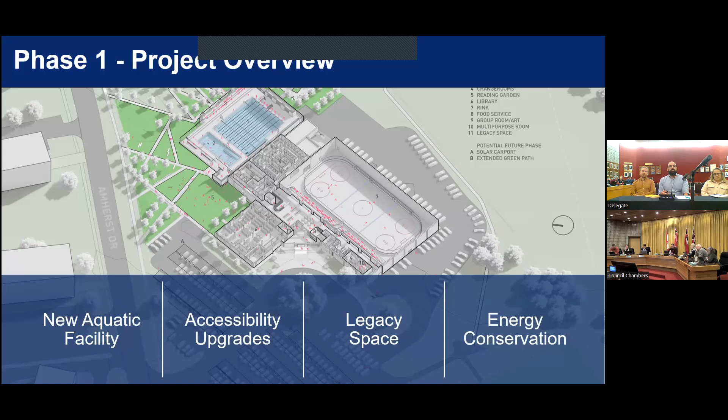Getting into it, the aquatic portion of the project involves the construction of a new 8-lane, 25-meter pool, as well as a leisure pool, shown circled on your screen. The old pool hall is being proposed to be converted to change rooms and administrative space. We are working within very limited space constraints, so it's a matter of figuring out how much we can fit in this space to provide the level of service expected from the community.

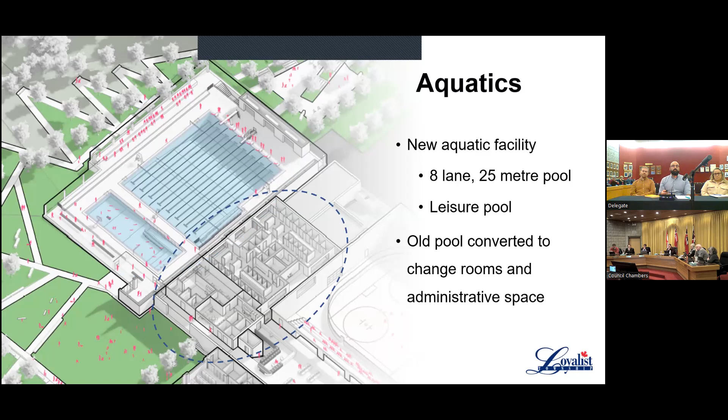We then move on to the arena portion of the project. As part of life cycle works for the facility as a whole, we are proposing a new arena pad, boards, and glass. This work needs to happen regardless of the community hub project, as this equipment has reached the end of its useful life and needs to be replaced in the next two years, as identified in our asset management plan. We're also looking at mechanical upgrades to the change room area, and accessibility upgrades here as well.

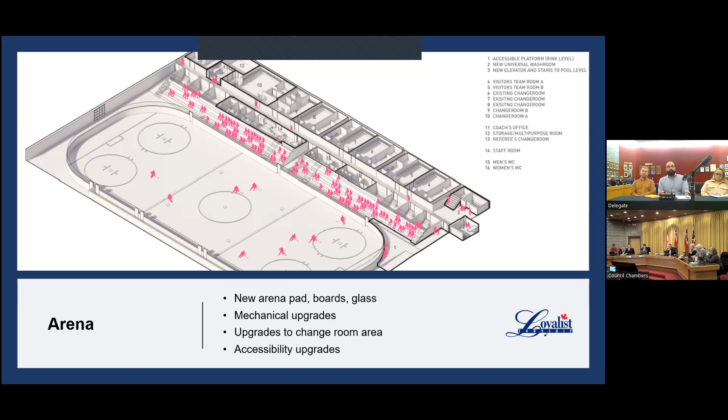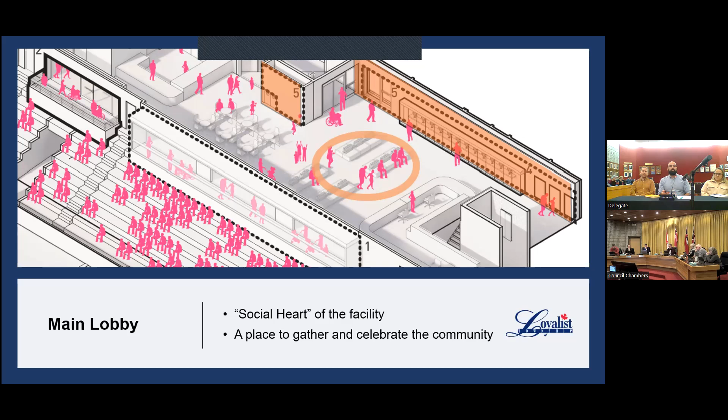Moving on to the main lobby, we'll be using the term social heart a lot. The reason we chose that is because it refers to a place in the center where the community can come together, celebrate, tell stories, and just gather as a community. So we figured the term social heart would be quite appropriate here.

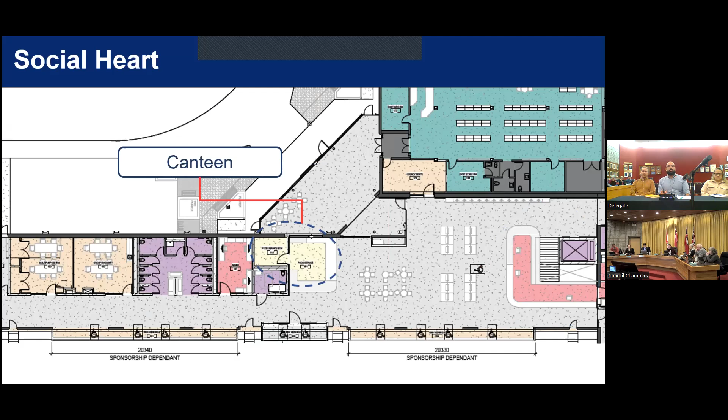Looking at a floor plan, everyone recognizes that triangular entrance that's almost iconic to the site. Going through the front doors, you'll see the front desk circled on your screen. People would work their way over to the front desk and be greeted by a customer service representative. The existing front desk would be converted to canteen space, and the washrooms would be renovated and retrofit to be accessible.

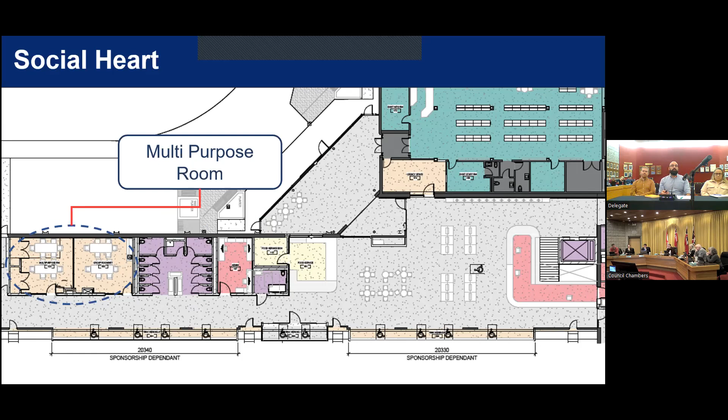Two multi-purpose rooms that could be joined into one would be created where the empty space currently is, and you can see some accessible viewing into the arena. There are two different concepts being proposed here. The middle one, detailed on the right of your screen, is an in-arena wheelchair viewing area that allows people to be within the rink and watch the action on the ice. The one on the left is in the hallway, but it provides that same viewing behind the glass to the arena.

The first one we are trying to incorporate into the project, whereas the second one is potentially sponsorship dependent, or depending on funding availability, because there's obviously a cost associated with this. One of our goals as a project team is to make the facility accessible for everybody, and we feel this is a very good way of doing it. Hockey is a very important part of our identity as a community, and we want to make sure it's accessible to everybody.

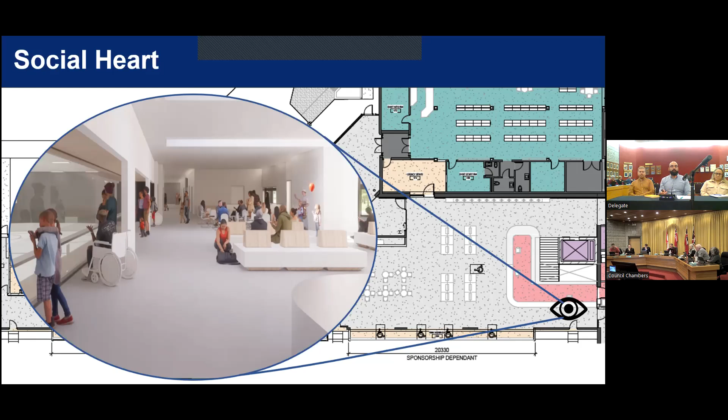The last part for the social heart itself is the inclusion of the legacy space. We partnered with the Gord Downie Chanie Wenjack Fund, an organization which, among other things, helps facilities and organizations create legacy spaces in their buildings. The purpose is to educate and spread awareness about local Indigenous history and our journey towards reconciliation. When we were putting our application into the GICB program, we figured this would be a really good partnership and a really good way to advance reconciliation in Loyalist Township and celebrate Indigenous communities specific to the area.

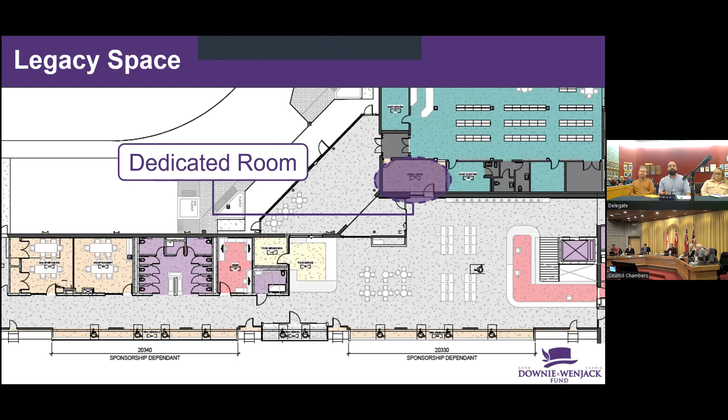The original plan proposed converting the library conference room to a dedicated legacy space, and that's still the plan. But we thought we could take it a step further. The orange highlighted areas are just wall space, and we thought this would be a really good opportunity, as well as everywhere else in the facility, to display our history, not just from the 1800s on, but also going back millennia. That open space can be thought of as a canvas to represent Loyalist Township for everyone, which goes back to the point of inclusivity.

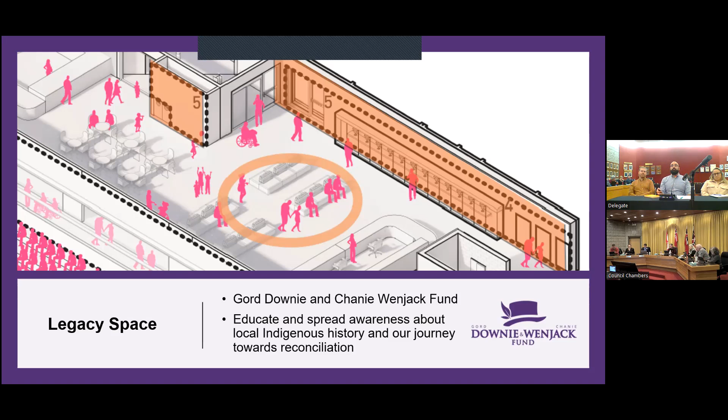The last point is energy conservation. As part of the GICB program we are receiving, we have to meet certain requirements, one of which is reducing our energy emissions, or greenhouse gas emissions, for the facility by at least 30%. We are going to try to take it a step further and target a net zero ready facility, but this is something that will be worked out through later phases of the design. Overall, the goal is to reduce our energy consumption.

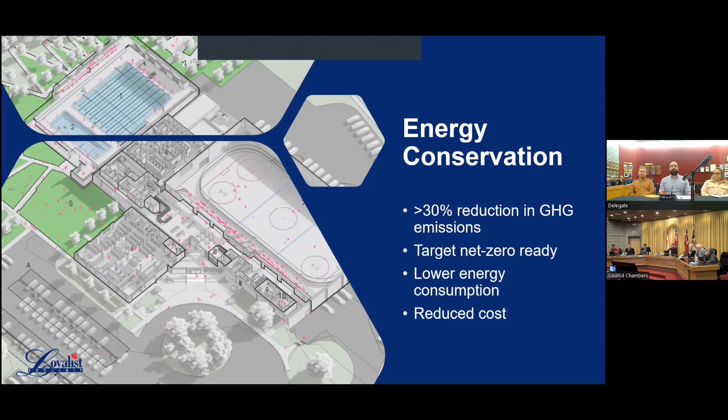Anyone who's looked at our bills will tell you that the W.J. Henderson Recreation Center is a bit of an energy hog, which is normal for a facility that has a pool, has an arena, and is 40 years old or more. Through these retrofits, we will be able to bring those costs down, as well as reduce our energy emissions and greenhouse gas emissions.

I'll do this last slide, and then we'll take a quick break for questions if needed. Really the thing to keep in mind with this project is that it's extremely complex. We are trying to build a new aquatic facility on an active site, effectively increasing the footprint of the facility by 30%, which is no easy feat, but then also incorporating everything I just talked about. Which takes us to our next point: these things are expensive, so we need to figure out a way to maximize the value of the taxpayers' dollars to deliver a facility that works and is efficient.

And the last part, which Carrie likes to remind me of, is the schedule — get this done as quickly as is reasonably possible. Especially for the pool, the closure in April 22, combined with the pandemic closures since 2020, really hurt the community in terms of access to aquatic programming, and there is really a need to bring this back as soon as possible. This is something we are quite cognizant of, and we are trying to move as quickly as we can while still doing our due diligence.

Despite the pool being closed, the arena is very much still active. What we need to make sure is that the user groups aren't disrupted the same way the aquatic user groups are. So another main constraint we're working towards is making sure the facility remains operational during construction for as long as possible. All the work mentioned for the arena, we're trying to schedule during the off-ice season between April and August, so that arena user groups are not impacted.

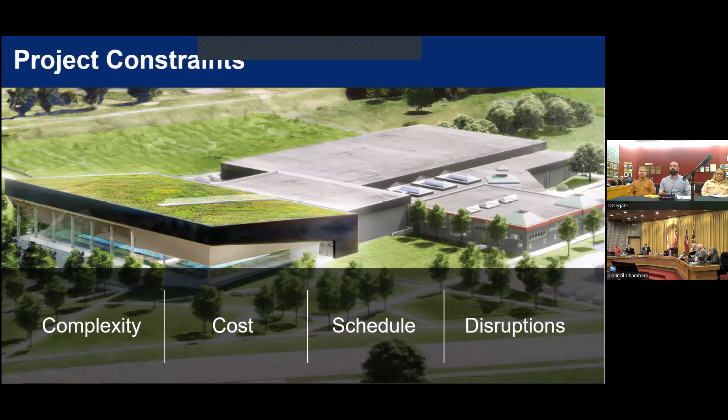Because of how complex this project is, as a township team we talked about it at length to figure out the best way to deliver it in a manner that met all of the community's requirements, and settled on a newer project delivery method. So we'll be talking about this a lot. Integrated project delivery, IPD, is a newer way to deliver large scale projects. It might be familiar to anyone who read the news — the city of Kingston delivered the Third Crossing, the Waaban Third Crossing, using this method.

So really what it is, is a collaborative approach to the project. Instead of us sitting down with the architect and putting very detailed designs together and tendering the project, only to be hit with 12 change orders the day the tender closes, the way IPD works is you actually bring the contractor on board during design. That gives you the knowledge from the person building the facility of all the things that could go wrong and how to mitigate them so you can stay on schedule and on budget.

Most importantly, in the planning phase of the project, because the people building the facility are actually helping you design it, the level of confidence we can have in our estimates is a lot higher than if we were just to sit down now and do a square foot estimate, which is how we would usually go about this. So this collaborative approach really spreads out the risk across the owner, which is the township, the designer, which is the architect, and the contractor.

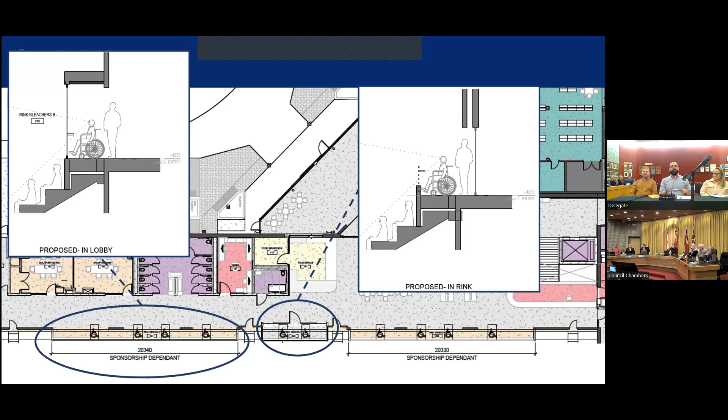It's just it might impact building HVAC and things, which I can't really speak to all that well. Once we bring Mr. Burbidge on, he might actually be able to speak to that better. Oh, there he is. Chris, would you like to talk?

Sure, good evening everybody, nice to be here. Thanks for having me.

I think it's six of one, half dozen of another in terms of in or out on that section. In fact, having people inside the arena, like the image on the right, is probably a little simpler, because we don't have to make that little roof area to enclose the space like the one on the left. So if there was a choice and a preference, you could always do more of one or the other.

Does that help? Does that cover your question? Yes, thank you. Thank you.

Any other questions from council? Councilor Parks.

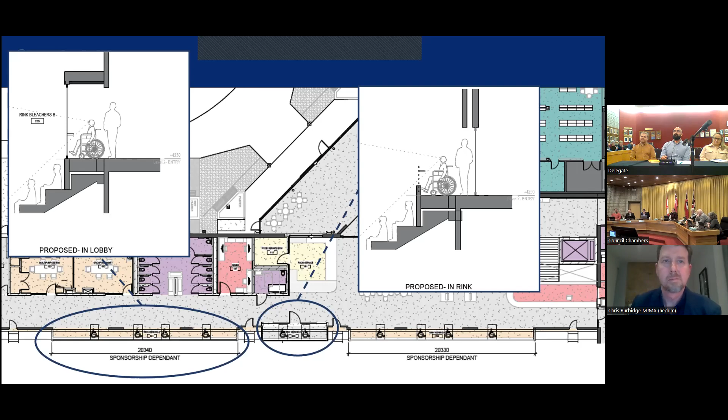Through the mayor to staff: the integrated project delivery, has the township done this type of program before? No, the township hasn't done anything this massive.

So certainly this is new to us. Part of what we're looking for in a contractor team is someone who has that experience and will be able to lead the IPD team as a whole. That was a big part of the evaluation criteria, the contractor's experience with IPD projects. It is new to us, but because of the complexity of this project, we feel it's the best way to make sure it gets delivered on time and on budget.

We're also doing our due diligence and researching it. We've reached out to the City of Kingston and other users of the contract to find out whatever information we can from them. We've reached out to lawyers to help guide the process, which Randy will speak to in a few slides. So this isn't something we're just charging into. We're doing our due diligence all the way along.

That kind of leads into my next question. With the City of Kingston, were they successful with this project with their crossing? Yeah, it was delivered on time and on budget. And just to note, that third crossing was through COVID, through the pandemic, which was a feat in itself probably.

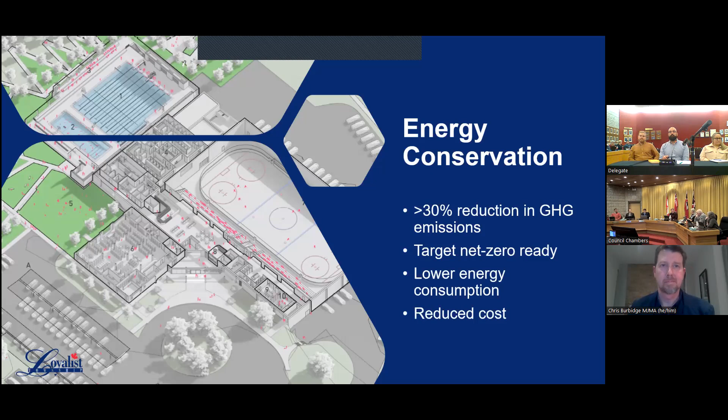Any other questions or comments from council? Just a question, are you getting further into the IPD process going forward, or would you like comments now on the contract project delivery? Yes, that would be good. We'll be talking about the procurement process a little bit later.

I don't have so much a question, other than it's completely new to me too, but I'm intrigued by it. Too many times you see projects that are designed and then when it goes to construct, there's concerns and the designer's already off-site. So it's field fit, retrofit, and it's always at an additional cost, and you don't get the same integrity in the product either. So this really intrigues me.

I watched the third crossing go in and observed what I could, and the process seemed to work very well. So with a project this size, being able to have all the players at the table right from the start, in my mind, seems like we'll end up with a far better product, a far more constructible product, and one that should be on time and potentially on target for cost, considering the company that's building it is at the table during the design. Very different from our staff deciding constructability versus the company that will actually be constructing it sitting at the table.

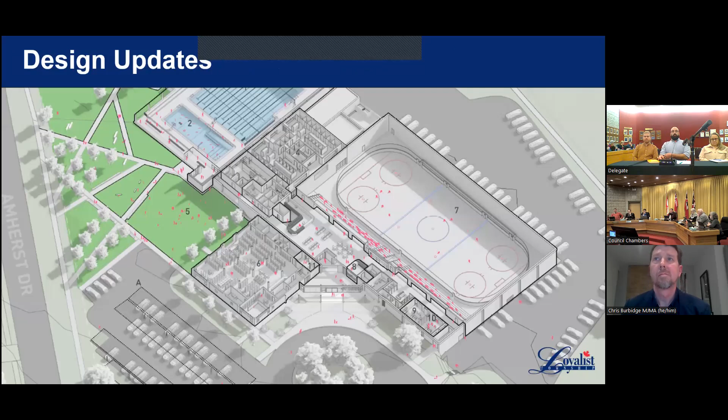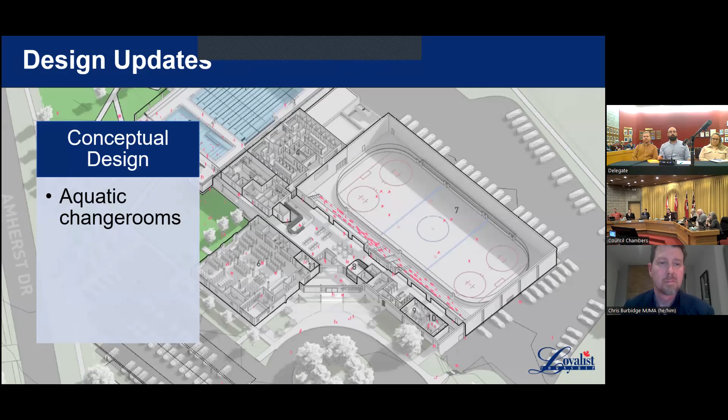So what are we going to do with everything that we heard? We again broke this down into several different categories. The first are things we can address right now in conceptual design, and that mostly pertains to the aquatic change room. So I'm going to turn it over to Mr. Burbidge to go over the changes from the original design and how we went about addressing the concerns we heard. So Chris, go ahead.

Thank you. What we're seeing on the screen is the original proposed fully universal change room setup. This is a methodology, a model we're using on most of our new facilities, but not all of them, and it certainly depends on the community and the use and the plans being considered. On this item, there was certainly passionate input during the engagement sessions, so I'll walk through this layout, and then we'll look at a proposed alternate we're looking at right now.

This basically applies universal change room facilities, genderless change facilities, throughout two sides, two halves that are joined together. When you're doing that, you have a common shower area that leads onto the deck. This is a shower area where you definitely want to be in your bathing suit while using it, because you've gone and changed at a private cubicle, and then gone in your bathing suit to the shower and then onto the deck.

Next slide. Or, one back, we have the option to subdivide this change room facility so you have two halves, and you could almost imagine it being used in a gender-specific way. In these situations, we provide blinds and closures to keep any views into the change room from occurring, providing a bit more privacy. However, you still have the shared shower area leading onto the deck, at which point you need to be in a bathing suit. There's also some duplication to this layout because you're doing it so it could be subdivided into two, so there's duplication of a universal washroom facility you can see on the left, and some duplication of washrooms like toilet stalls, because you're trying to accommodate it broken down into two different sides.

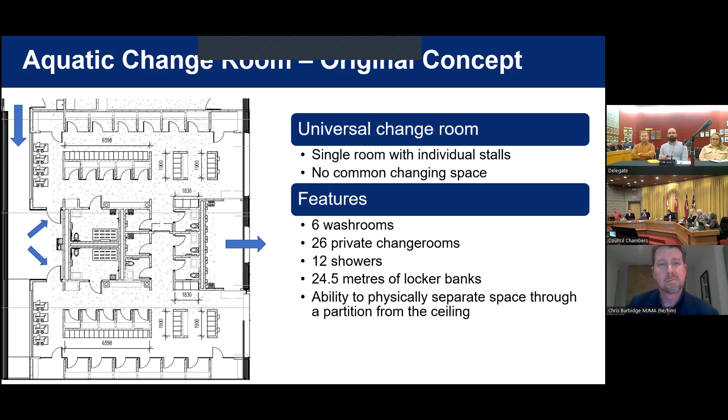Now, this is the proposed alternate, which is basically a return to a male-female setup, but we're flanking those around a universal core.

So the plan here is to come into a shared corridor for everybody. And when you come into that place, you have the option to go to flanking gender-specific change rooms on either side. That's the orange and the red, or orange and yellow bars on either side of the green. The green is the universal change room, again with that same concept of private stalls and a shared shower facility.

Here's where you see the three showers. If you've gone to the top one, you have a unique shower, specific to a gender, and then private sight lines from the deck, so you can shower without your bathing suit on and then head out onto the deck. The green remains the bathing suit shared universal setup, and the yellow is again another private shower on the bottom.

These arrows just indicate that movement through. But what's interesting about this model, which is different than any model we've done where we have three types of other facilities, is that you still come into the shared space. So there's a sense of universality in this layout. And if you're in need of going to a gender specific change room, where you're more comfortable, you have the option to do that.

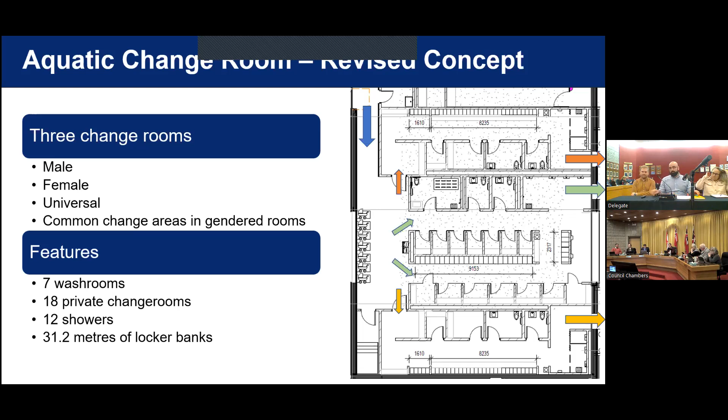Hey, everyone's here. We'll reconvene the meeting at 7:45. Yes, he's still online. Good. Please proceed. Okay, thank you.

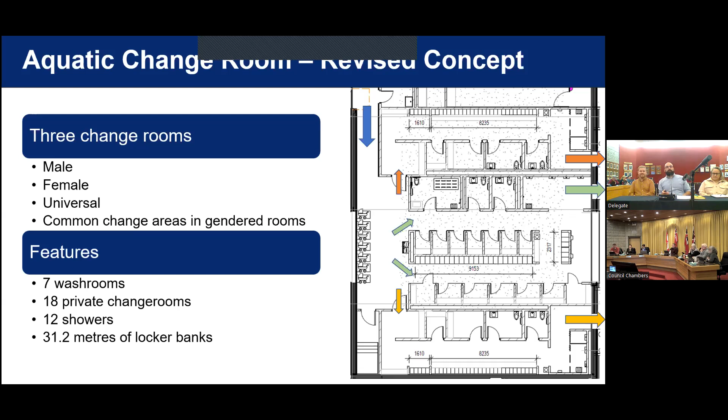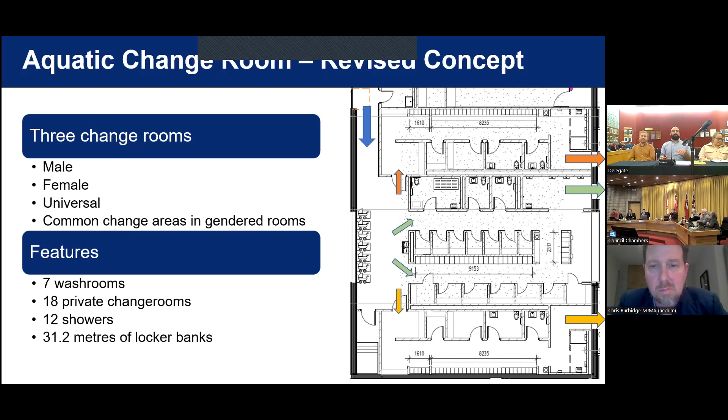So before we move on from this, the report does note that we will be looking for direction from council on which option to proceed with. We'll deal with that at the end after the report is finished. The reason we are looking for that direction is because that's something we've answered at the conceptual level. The next section of the presentation deals with requests we've heard, which we think can be accommodated, but we need to confirm that during validation because it'll take work.

So we did talk about FINA pool standards, so we'll certainly be reviewing that. Same thing on pool depth, seating capacity, and handrails in the arena. These are all comments we've heard that we think are completely reasonable, and we'll be investigating them in more detail during validation to see how we can go about delivering them properly.

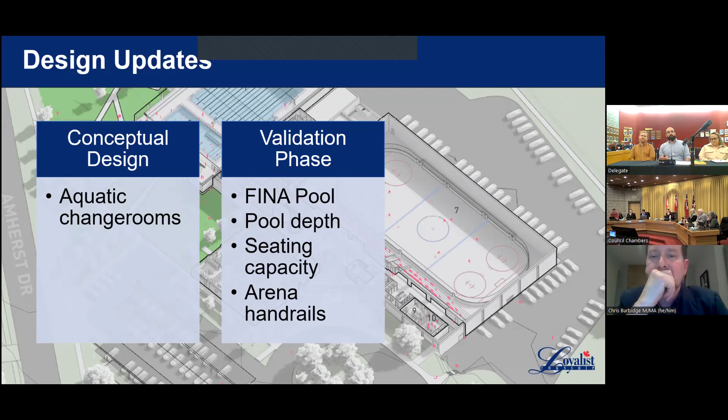Unfortunately, there's a last category, which is things we cannot accommodate. That includes the pool length and the inclusion of a sauna or hot tub in the existing aquatic building. As I mentioned earlier, we're very much constrained by our footprint expansion to 30%. The aquatic facility presented in the conceptual design right now is 30% on the nose. Chris and his team have done a fantastic job getting as much crammed into that program as possible, but going beyond that is really not possible at this time.

Going into more detail about the pool length, 25 versus 50 meters, the costs associated with that expansion are pretty substantial. Capital costs themselves are double, as one would expect. Same thing for operations—you're going through twice the volume of water, twice the chemicals, and most importantly staffing. Staffing requirements actually go up as the size of the pool goes up, and there are concerns around being able to attract enough lifeguards to staff the pool for the amount of time it would need to be open. So we really can't recommend this at this time.

In terms of the mini stick facility, space constraints are again very limiting, and there are some concerns around insurance and staffing with that facility as well.

So anecdotally, from what we heard from our colleagues in different municipalities, they're having a hard time with their mini stick facilities, and they're considering shutting them down just because they don't have the resources to allocate to supervising them at all times.

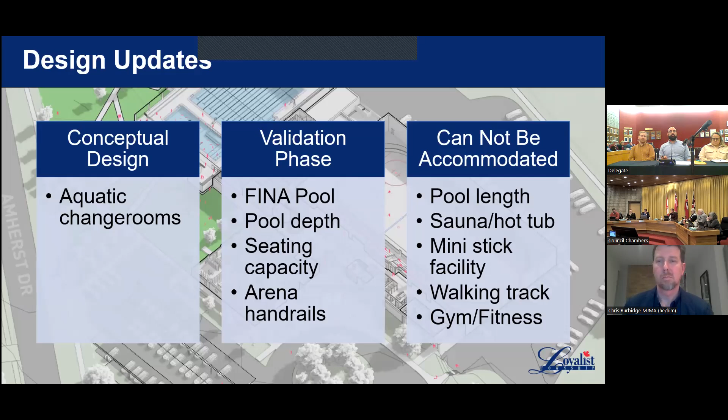Council Browder: I just had one comment on the walking track concept. Depending on any changes to the arena, I'm thinking of the scorer's box or whatever you want to call it - that thing wasn't there in off hours. You could have a decent little walking track around the arena. Obviously you're not going to be using it during the Jets Junior C game on a Sunday night, but I'm thinking of the off hours, like this morning when I was at senior skate, there were only 4 of us in the building. That's something down the road, I guess.

Yeah, and that's a really good point, Mr. Mayor, that jogged my memory. So a dedicated walking track at this time is not possible, but there is currently a program being offered at the Recreation Center in partnership with Public Health, called Walk for Life. We can look at building on or expanding that, creating markers and waypoints in the proposed facilities so that people who participate in Walk for Life can continue to do so in a revamped facility, which will be a lot more engaging and inviting.

Council, any other questions or comments?

Just a question - it was brought up about the elevated walking track, and you mentioned that could be a consideration. I'm assuming that during the validation report, that would be one of the options, and that if it was included, it would come back with the additional cost and time delays all built into the validation report? Yes, it would certainly be built into the validation report for council consideration. Okay, thank you.

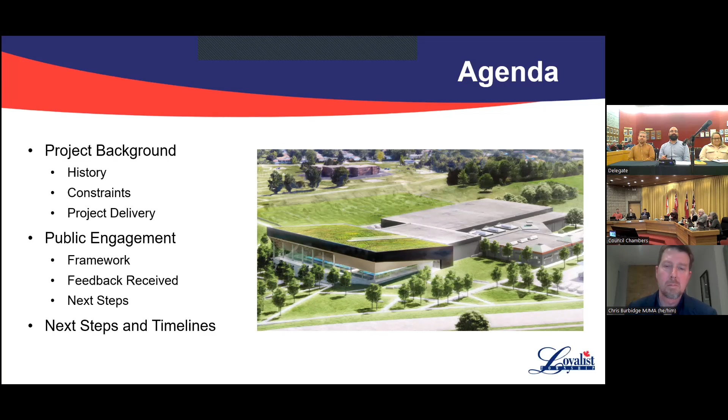And if there's no other questions or comments, please proceed. Thank you, we're almost there.

So in terms of next steps, we talked about project delivery and wanted to give an update. We are in the process of finalizing our contractor for the project. So as we discussed, the township is the project owner, MJMA is the project architect and project designer, and the last piece of the puzzle is the contractor and potentially other parties, depending on their level of involvement. We are in the process of procuring their services.

Because of the size, monetary value and complexity of this award, once it's awarded, in the interest of transparency and being open and fair, we thought it would be appropriate to hire an external third party to oversee the procurement process. So we reached out to the Procurement Office, a lawyer company based out of Toronto who specialize in procurement, to actually administer the request for proposal process on our behalf, just so they can make sure everything is done in a transparent manner.

So because this is an IPD project, the way we are evaluating contractors is entirely based on qualification and experience - who's the best person for the job. There's no way to fairly ask any company to submit a price on this sort of project, because we can't just put a design in front of them and ask how much they think it will cost. It's not fair, and if someone gives you a low price, that's not necessarily honest or fair either. So because of that, that's another reason why we thought having someone oversee our procurement process would be prudent.

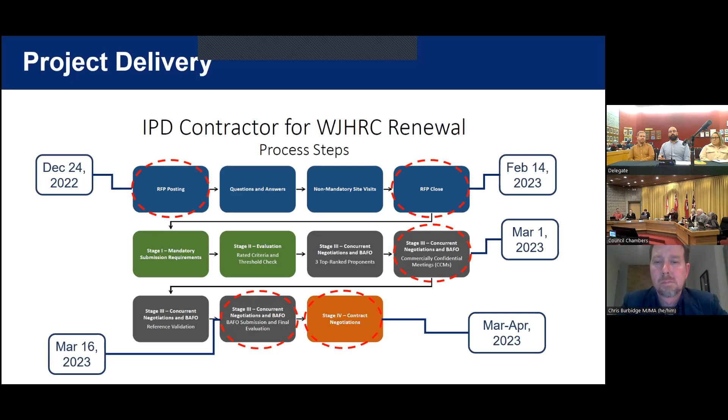Once that proponent is identified, we enter into contract negotiations, which could take anywhere from 10 days to 3 weeks. We're hoping we'll be able to come to council in April with a recommendation to execute an agreement for the IPD team as a whole.

In terms of timelines, April 23rd, you can expect to see us back here with the proposed team, and then requesting that the CAO and the mayor be authorized to execute the agreement with the proposed IPD team.

The next day we'll be getting ready to work and starting the validation phase of the project and the development of the business plan. We're anticipating that will be in front of you in the second half of 2023 with those two documents, at which point council will be able to give a go or no-go for the project based on reliable information.

During that time, we'll continue with our public engagement and community consultation, just to make sure that as we make updates to the design, the stakeholders involved have the ability to say whether or not it meets their needs.

We'll continue that process, and we'll be continuing with Indigenous engagement as well. So the community will be hearing from us, and we really do encourage anyone watching who hasn't signed up for the project email list to do so, just because we will be providing updates through that medium as much as possible, as well as social media.

On the township website, depending on how things go at the presentation of the validation reports, we'll be moving right into design and procurement, hopefully breaking ground either late this year or early next year. The GICB grant program does have a mandatory completion date of March 2026, so we'll be aiming to have everything done by the end of 2025 and the facility operational by then.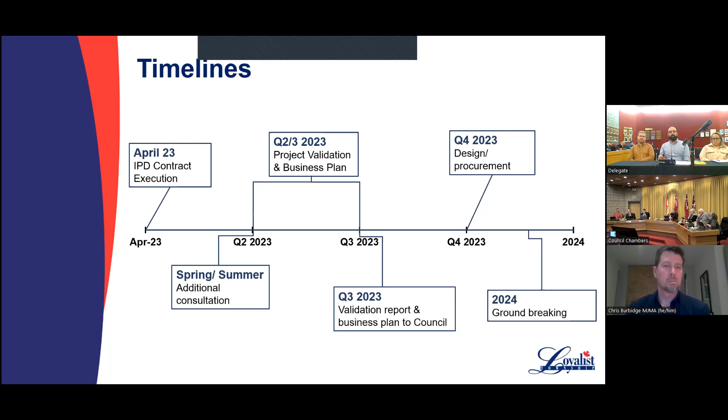But those timelines will be presented with more detail and a bit more certainty during the validation report at that time. That's it from us. Happy to answer any other questions you might have.

Thank you. Council, any questions or comments on what we've received? Councilor Pryor: Can I ask questions on the actual report as opposed to the presentation? Chair: Why don't we finish the presentation and then go to the report, if that's okay, just to keep it clear. So on the presentation, any further questions or comments?

I just have a couple. During the decision-making for bringing a contractor on board, do they provide, there'd be a few items depending on the company, that they would have subs in that. Is that identified at this stage, or is that at a later date once we're further down the design process?

That's a really good question, and you hit it on the head as to why it was so difficult writing that RFP. There are several ways to go about it. You could theoretically find a general contractor who has the staff and the workforce to build the whole thing from start to finish, but that doesn't mean that's the best value.

A company based in Western Canada could fly in their crews to come work here, but that wouldn't be a good value for money, in which case they would subcontract out a lot of that work. Because we don't have enough detail at this stage to say what kind of subcontractors are needed, it's not realistic to expect them to name them at this point. The new aquatic facility might be entirely glass, or a wooden building with some glass on it - different subcontractors would be needed for different options, so you can't really name them now.